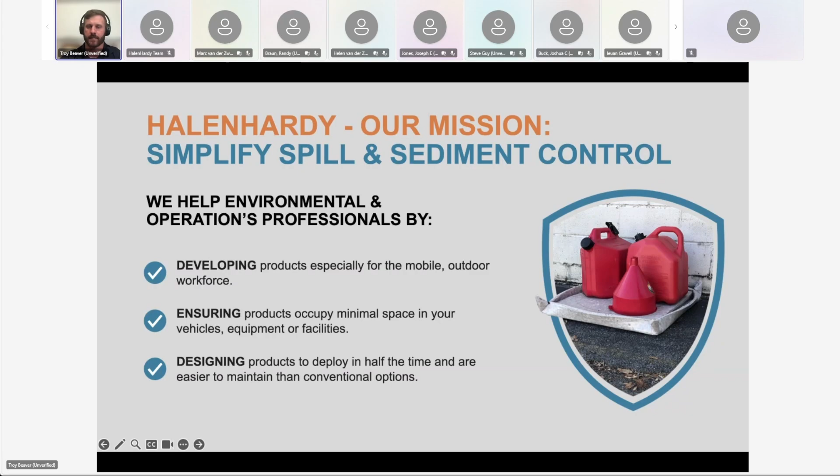Number two, ensuring products occupy minimal space in your vehicles, equipment, and facilities. We know that most of our customers, due to the fact that they're not working inside of a building, tend to have minimal storage space and place to keep stuff, whether it be working out of their truck, working out of a job trailer, you name it. So we're always looking for ways to make sure our products take up minimal space and designing products that deploy in about half the time and are easier to maintain than conventional options out there on the market, which we'll talk a lot about today.

4 core areas of focus: spill cleanup and containment in the outdoors. That's anything from land-based spills in wet, rainy conditions to containing and cleaning up spills on water, or products to put under persistent equipment leaks in the outdoors. We also focus on filtering oily sheen from inside of stormwater inside of secondary containment structures, as well as filtering sheen, silt, and sediment, as well as other contaminants from stormwater runoff around ditches, outfalls, storm drains, catch basins, you name it. And then mainly what we're going to be talking about today, our 4th area, which is one of our products that kind of falls within our dewatering area.

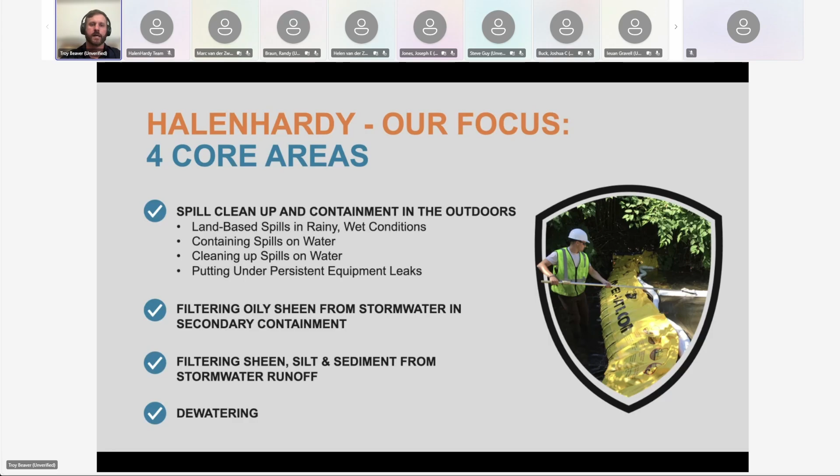So in the chat, it's always good to review these afterward with our folks to see how many people really know - are we educating them? So how many of you have built or seen a coffer dam being built? Feel free to just type yes or no into the chat, give a thumbs up, thumbs down, whatever it may be. We'll review those afterward and see how many people really knew something about this or didn't, but it's always good feedback for us.

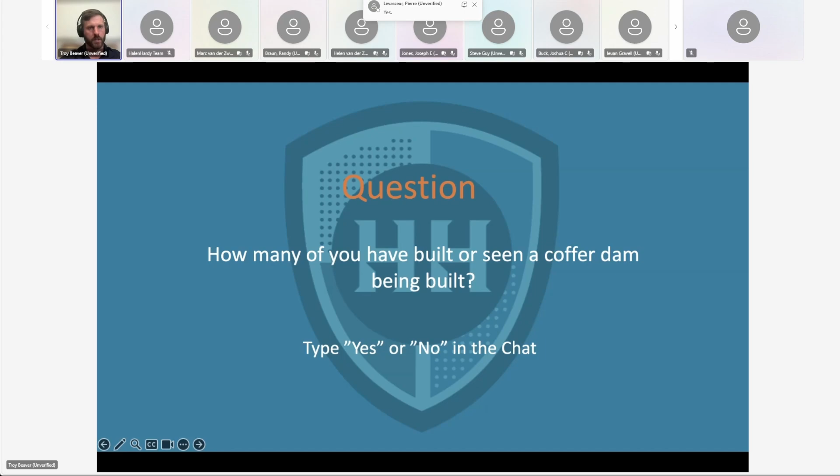So what is a coffer dam? A coffer dam is an enclosure built within a body of water to allow the enclosed area to be pumped out or drained. This pumping creates a dry working area so that work can be carried out safely. Coffer dams are commonly used for construction or repair of bridges, culverts, pipelines, or other infrastructure that travels through or under a body of water. Coffer dams can be made via different methods.

I have a few pictures here. This is a handful of dozens of different methods. I'm not going to get into every method of coffer dams that there is, but you can see a few here. On the top left, you have bulk bags or sandbags. On the top right, you have a metal frame with some sort of impermeable tarp material.

Bottom left, you have a large tube that is essentially filled with water. You pump water into that tube, it fills up, and it uses the weight of that tube to seal itself to the stream bottom and prevent water from getting into that working area. Bottom right, these tend to be deeper, bigger bodies of water, but what you call sheet piling, which is large sheets of metal that are essentially pounded into the stream bottom at a predetermined depth, creating an impermeable structure.

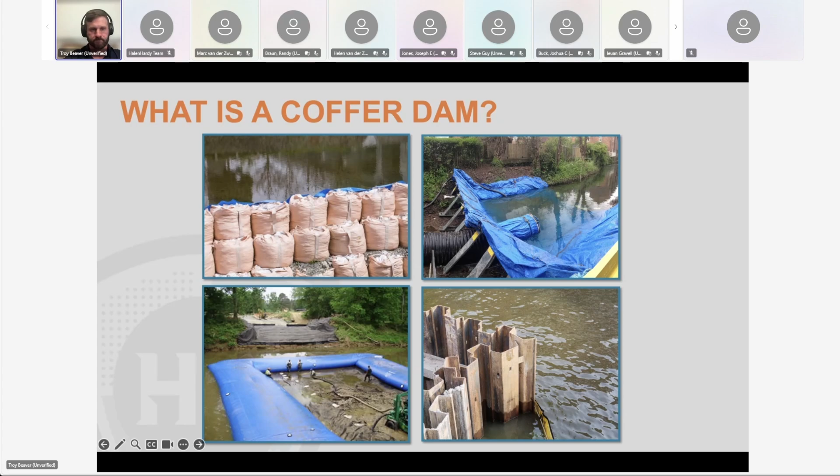So a little more in depth on why coffer dams - I like to say safer, drier, faster. There are a lot of times where work needs to be done in an area that's wet - it could be a lake, a river, a stream, a shoreline, some other body of water. Most of that work can only be accomplished if the area where you're working is dry.

You can see in this picture, this is a pretty extreme case. You've probably wondered, if you didn't know, how they pour bridge piers. Obviously there's a lot of water, especially over larger bodies of water, so you can see here a pretty large coffer dam. Not something we're going to be talking about with our product, but it gives you the far end of the spectrum when it comes to coffer dams.

These coffer dams can be used for things like I mentioned before: bridge construction, shoreline restoration, boat ramp construction, pipeline construction or inspection, repairing retaining walls or bridge piles, or removing even sunken vessels. Overall, a coffer dam takes an otherwise difficult area to work in, due to the fact that it's wet or underwater, and makes it safer, faster to do the work, and drier in order to accomplish a task that otherwise could not have been accomplished.

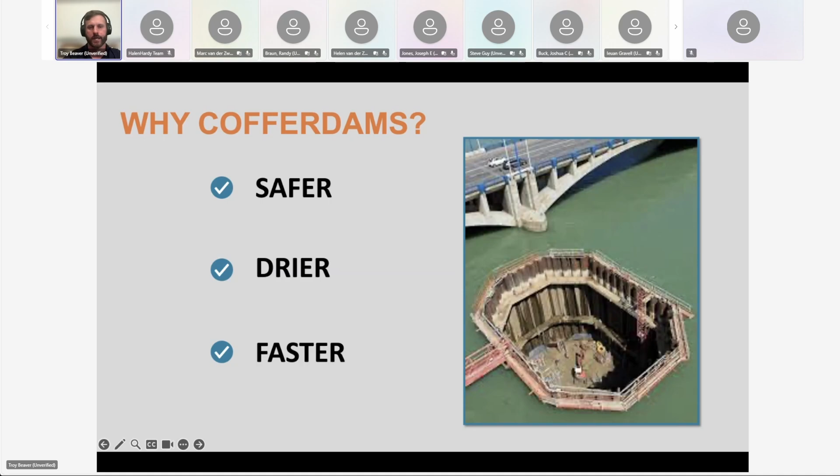What are the difficulties with some of the traditional styles of coffer dams? There are always some difficulties associated with any style of coffer dam that you're going to use. Here's a few bullet points. Problem number one: traditional coffer dams, no matter what you're using, typically require a lot of time and equipment - time to fill and deploy sandbags, or install sheet piling, or move dirt around, and a lot of manpower or equipment to install.

You can see in this picture here, this is using bulk bags, with some sort of overhead crane structure to drop these things in. You can see all the people standing there - well, half of them aren't working, but a few of them are.

There's also the time to prepare the stream bed, remove all the rocks, make it as flat as possible. Because if you're trying to keep the area on the other side of the dam dry, you can't have a lot of structures underneath whatever you're using to create your coffer dam, or else it's just going to cause leaks and water to pour into the area you're trying to work within. So you need to get all the rocks removed and make that as flat as possible.

Time and pumps are required to fill the water fill barriers. I talked about the tube fill barriers earlier - having pumps there to pump in, depending on the size of them, takes time. How long does it take to pump water into those to fill them up? And then there's time to redeploy in case of a blowout.

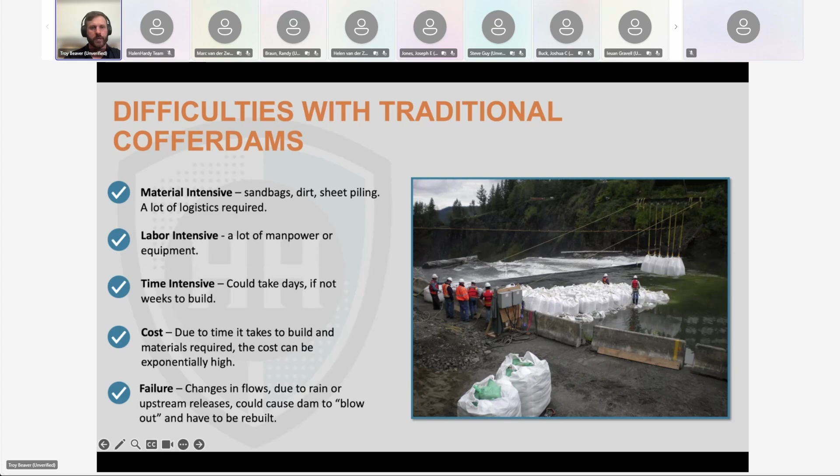So hopping into what we're here to talk about, the actual product. To address these difficulties, we have what we call the instant coffer dam, which is made to simplify the process of creating the coffer dam and address the difficulties I just spoke about. It's lightweight and portable, deploys in minutes with minimal manpower. I'm going to show you videos and pictures of all these bullet points, but just running through them real quick right now.

It uses just the flow of the water to deploy itself and the weight of the water to anchor itself. You can attach units together to make unlimited lengths. And finally, it's environmentally friendly because it creates limited to zero waste, due to the fact that it can be washed and reused over and over again.

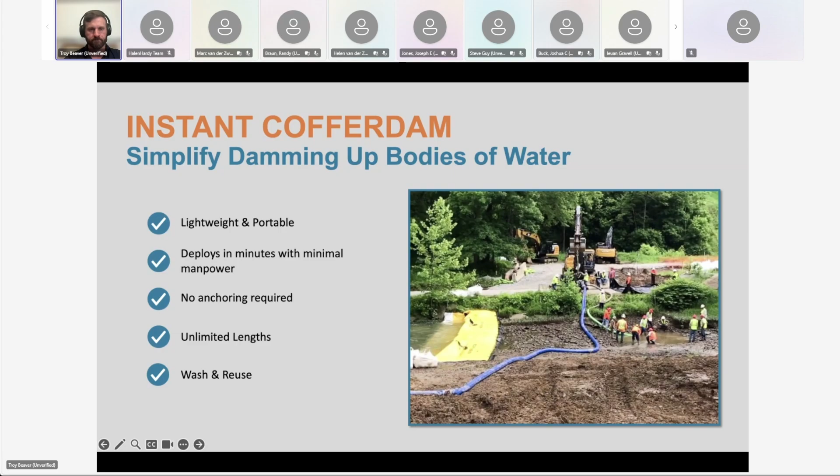So how does it work? The concept's actually pretty simple. As I mentioned before, the instant coffer dam uses the flow of the water to deploy itself, and then the weight of the water to anchor itself. So as the flow enters the dam, it deploys itself, just using the weight of the water to hold it to the stream bottom and then seal itself to the stream banks.

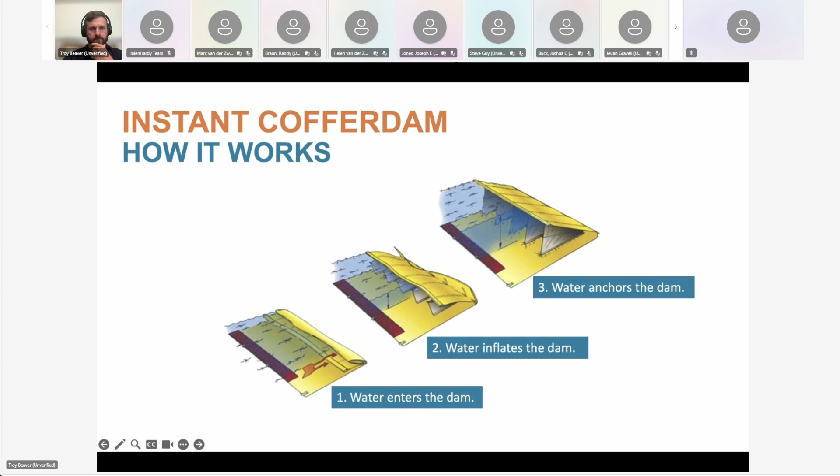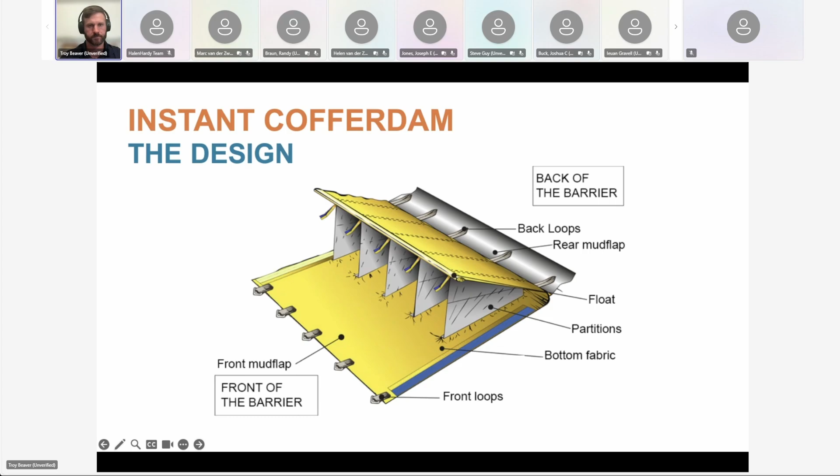So how does it anchor itself, or stay in place without any physical anchoring required? It's the force of the water inside the dam holding it in place. It's engineered at a 4-to-1 ratio, based on the width from the upstream side to the downstream side being the 4, and the retention height of the dam being the 1. For example, a 28-inch high dam is approximately 9 feet from upstream to downstream. This means you get 4 times the vertical thrust compared to horizontal thrust, giving it great adherence without requiring anchoring.

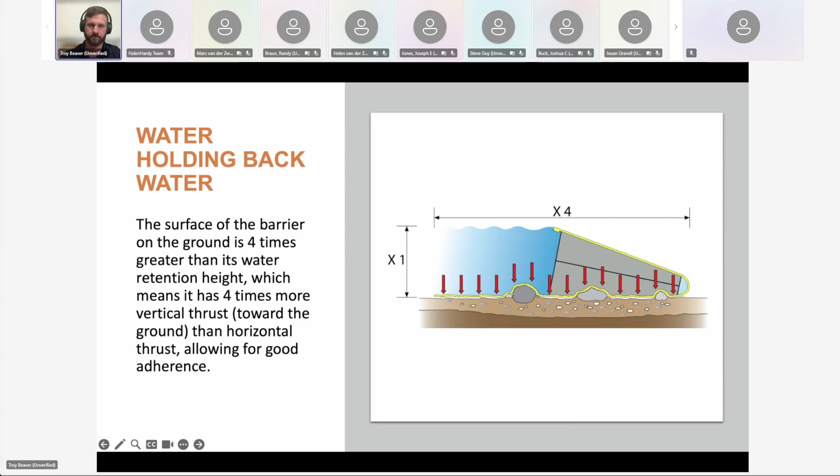So how does it work? This video does a pretty good job of showing a pretty simple installation. 39-inch high dam here, 50-foot long. You can see the stream is about 30 to 35 feet wide.

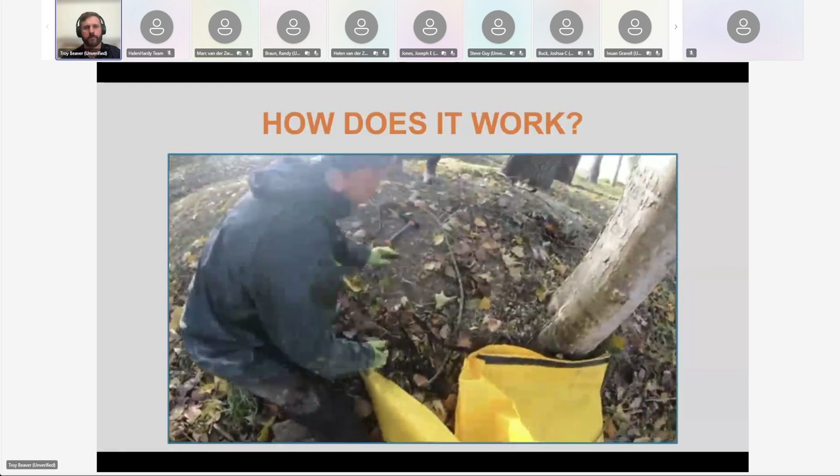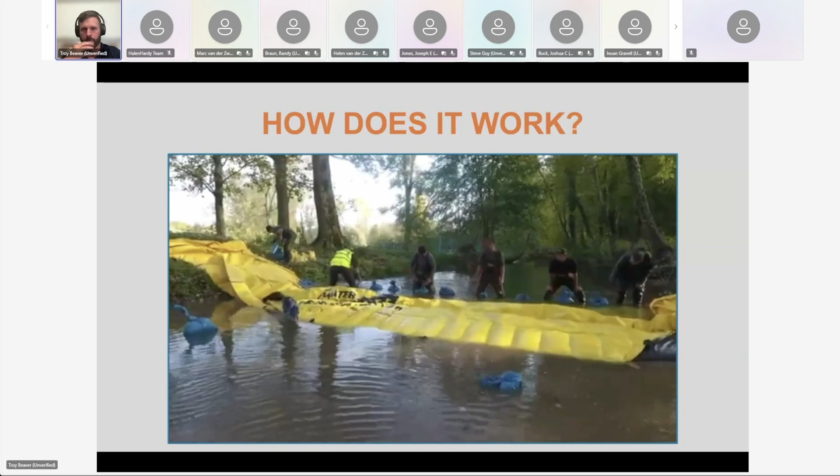Anchoring it just holds it up on the banks until it gets water into it, not really anchoring it on the leading edge. You're just submerging that leading edge and standing on it. Some people, we recommend, put a row of sandbags along there so you don't have to stand there until it gets water into it. But once it has about 6 to 8 inches of water in it on a dam that size, it's holding itself in place.

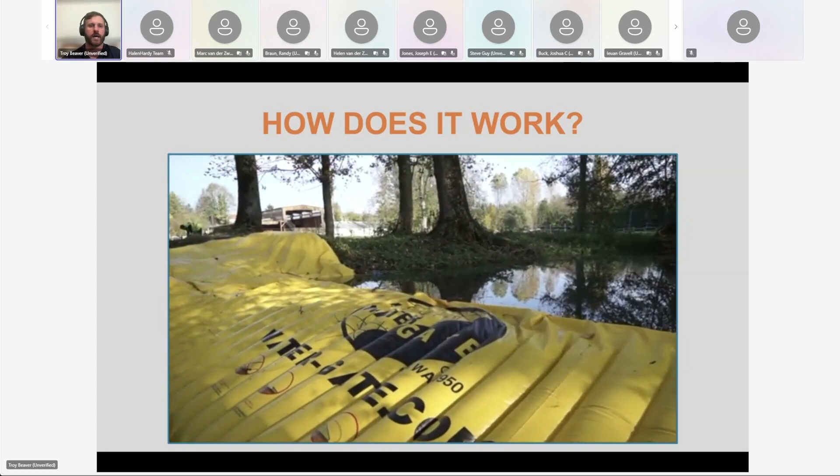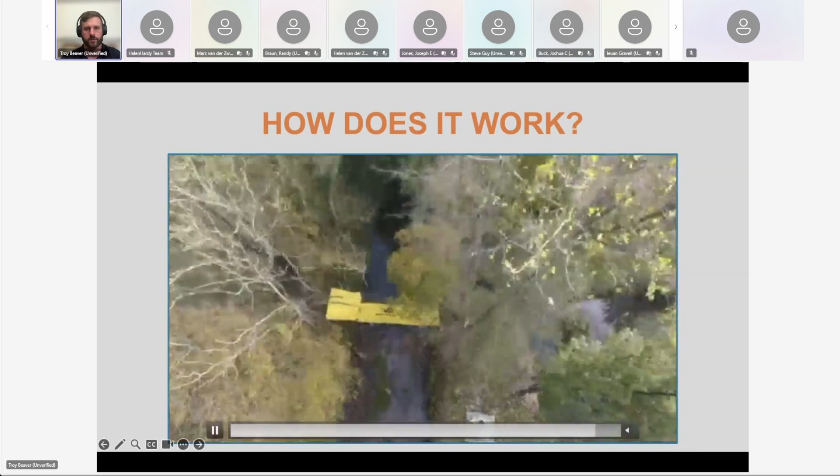So it's just using the weight of the water. The sandbags just help a little bit to hold it down until you get water flowing into it. But you can see in a matter of minutes you can have a dam deployed. In this case, they're using a diversion around another channel, and the downstream side is the dry portion they want to do work in. It's as simple as submerging that upstream bib, letting water fill it and anchor it down, then you can start pumping on the downstream side to dry it out. In this case, it was a pretty steep slope stream, so the water used the path of least resistance and headed downstream, so no pumping was actually required.

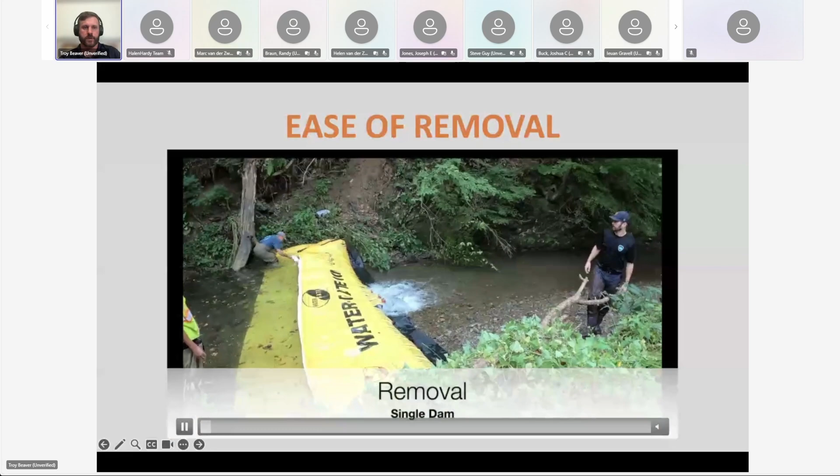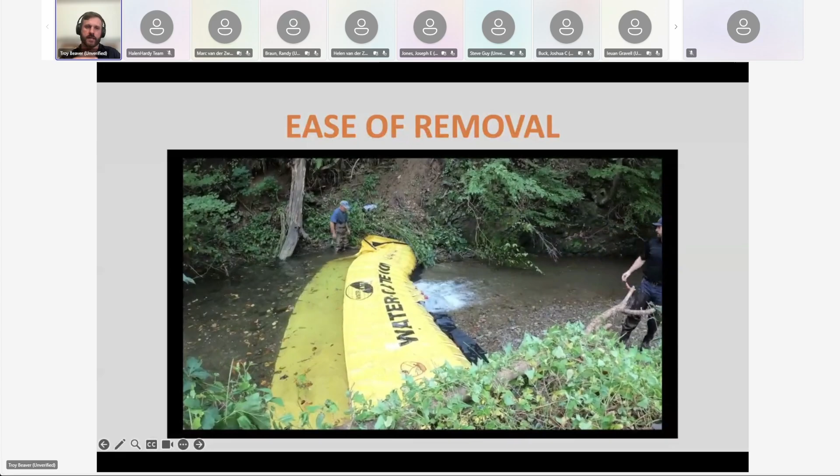For a single unit, all you're doing is going to the opposite bank of where you want to swing it. You start peeling it off that bank and allowing the water to flow around the outside. Once the water starts to flow around the outside, it uses that flow to swing it to the opposite bank, and then you can pull it out, wash it up, and reuse it. Those lifting straps are on the back end — you grab hold of those and pull it out.

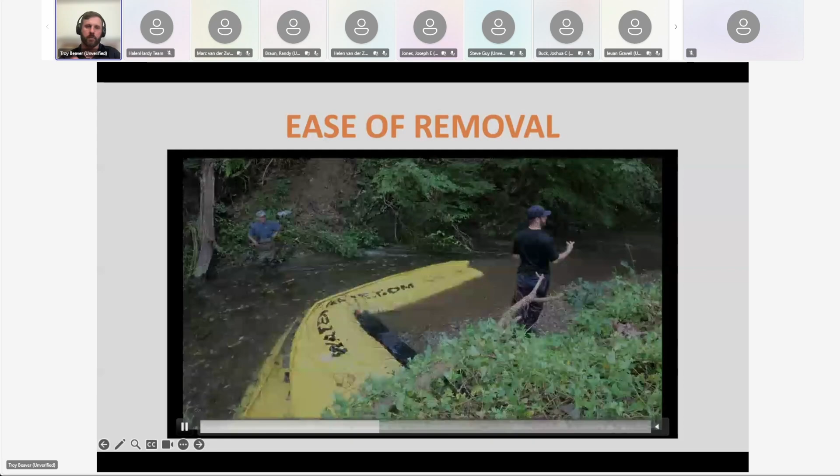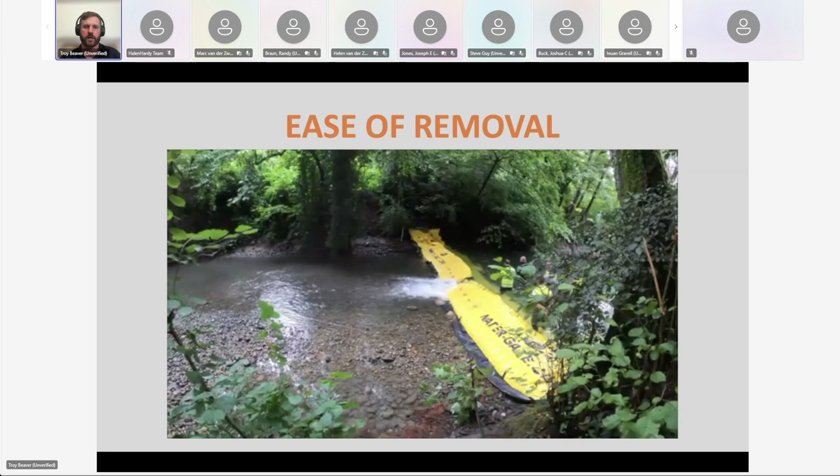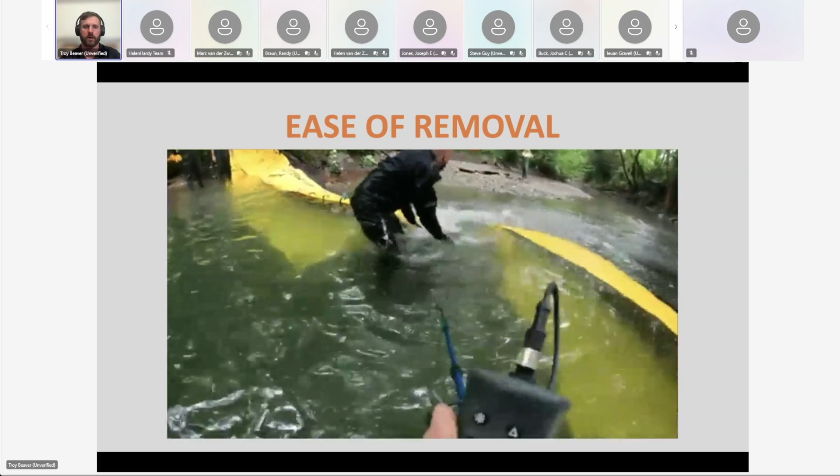With multiple units, it's not as easy as just going to the opposite bank. As mentioned, you attach multiple units together. You go to those seams and start peeling it apart — peel apart the top seam, let the water start to recede a little, then go to the stream bottom seam and peel that apart. Now it's using the flow of the water, just like a single unit would, to swing the units apart and allow the water to recede. The units will swing, let the water recede, then you can just pull them out, wash them up, and reuse them.

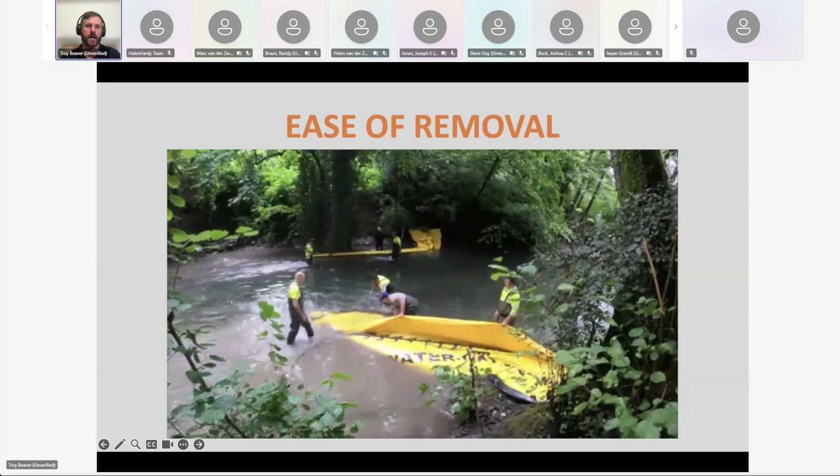So it's pretty simple, there's no difficulty to it. You're just using the flow of the water, just like you use the flow of the water to inflate it.

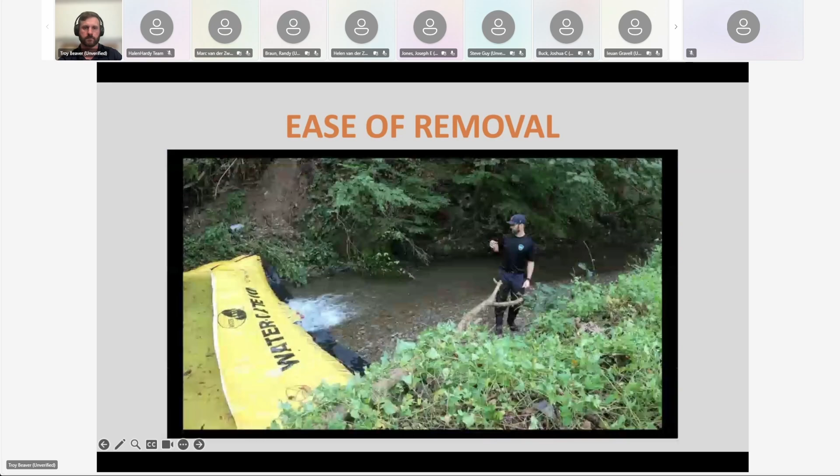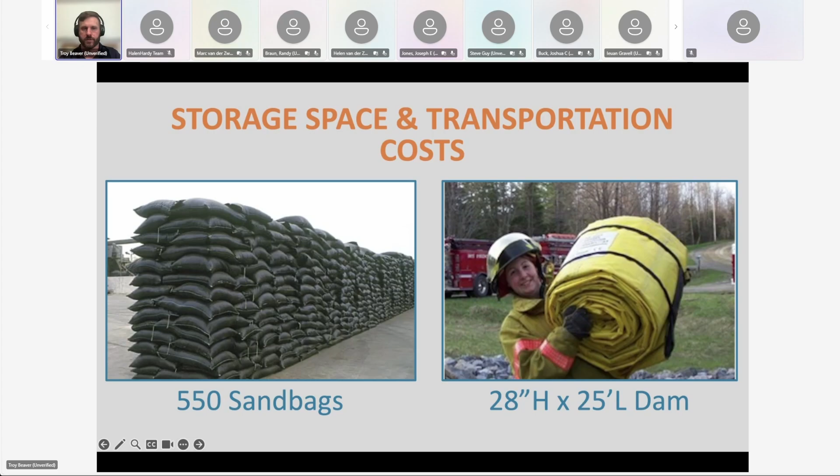So I haven't done the calculation on, you saw that first dam in the first video, which was 39-inch by 50 feet. I could probably do those calculations, but you're probably looking at 5 to 6 times that amount to create that same dam. So you can imagine the amount of storage space, transportation costs, and everything else associated with trying to get that stuff on site and deploy it.

As I mentioned, unlimited length. So these units can be attached together. On the left there are 30-foot units attached together, so 90 feet coming in three 30-foot units. Attaching them together makes it nice because if you have one project where it's a smaller stream and you just need a single unit, you're not trying to manhandle a 90-foot unit, right? But if you get into a larger project where you do need 90 feet, now you can take multiple units and attach them together to make that.

It takes minutes to attach these things together once you get good at it, a couple times, and it becomes pretty simple to attach the units together. All the attaching is very heavy duty Velcro. It's been third party tested that it's going to hold up under the pressure of the water that's going to be created on those dams based on the height of dam you have. We've done pretty much every height of dam we have in some pretty large bodies of water, and we've never had a single unit fail at the attachment point.

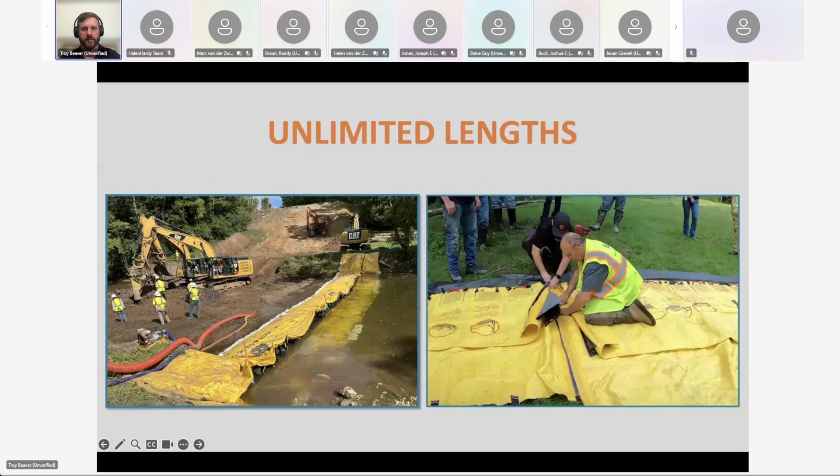Another key attribute, quickly access remote areas, right? So this is actually the picture where you saw the firefighter carrying the dam. This is the same size dam that you would have there, 28-inch high, 25-foot long. So about a 10 to 15-foot wide stream you can see here. Very remote area where this needed to be dammed up.

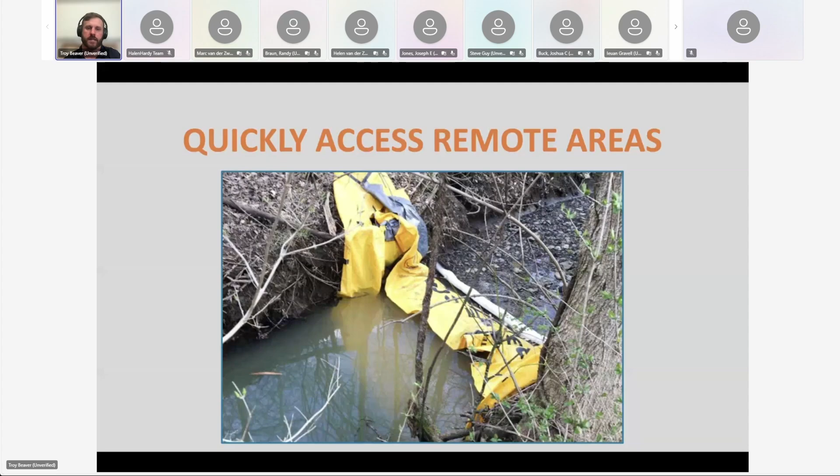So down over steep banks, it would have been very difficult to get any type of equipment in there, difficult to get any type of materials really in there to effectively build a dam in a cost-effective and timely manner. This took minutes. They come rolled up, you can roll it down over a steep bank, get down there, unravel it, stretch it out across the stream in minutes, and you have the water dammed up.

The other thing that I mentioned before with traditional cofferdams, when you're building them, you have to get the stream bottom pretty smooth, right? You don't want any rocks or any type of objects underneath traditional cofferdams, because all they do is create void space where water can travel through, essentially getting into your dry area and defeating the purpose. With this, really all you need to do is that first 12 to 18 inches of where the bib lays on the stream bottom, that's where it's creating its seal.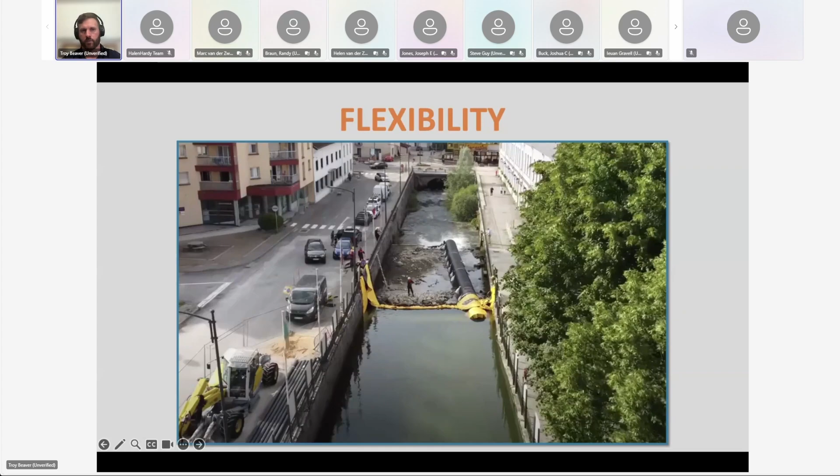As water enters that dam, it's using the weight of that water to conform it and seal itself better. And the majority of your seal is happening within that first 12 to 18 inches. So again, time savings, money savings due to its flexibility and not having to remove all that stuff before installing the dam.

Here's another good picture showing culvert repair, right? Flexibility of the dam going up the sides of the wall. You can see just anchoring it into the wall of the culvert there. In the event that you can actually get to the top of the wall, if it's not a fully enclosed culvert, you can just lay it up over the top and put some weight on it to hold it there.

In this case, they're obviously inside a culvert, so they are drilling in and putting anchoring points in, where it would be difficult to get a piece of equipment in, get different types of materials in there to build a traditional cofferdam. Here's a good picture of it in a very difficult area, but the flexibility of it to go up walls that are approximately 90 degrees straight up.

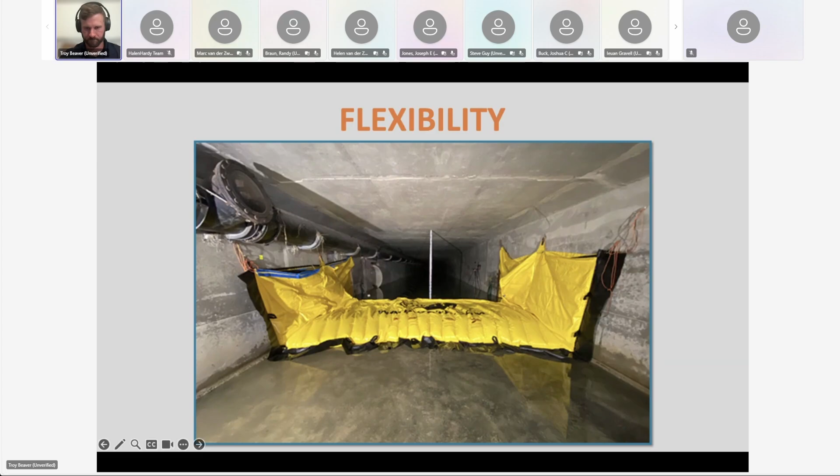So from a time savings aspect, I'm comparing what it would take to build a 25-foot long by 28-inch high dam. So when do you typically put in our 28-inch high by 25-foot long? It's approximately a 10 to 15-foot wide stream, right? You need excess length to go up on each bank to make sure you're above the height of the dam. So with a traditional cofferdam, you're looking at a minimum of about 6 hours to mobilize, deploy, and tear down in a stream about that width with a height of 28 inches of dam.

With the instant cofferdam, you're looking at under an hour to mobilize, deploy, and tear down. The majority of that time actually is just your mobilization time. Obviously, due to their size, you're not going to need a trailer or flatbed, so they can easily be stored on site or even brought in a pickup truck.

Not to mention, in the event that there is a heavy rain event, the dam can actually overtop, as I mentioned before, by about 33% of its height. So it can just remain in place, unlike a traditional cofferdam, which would probably blow out and need to be completely rebuilt.

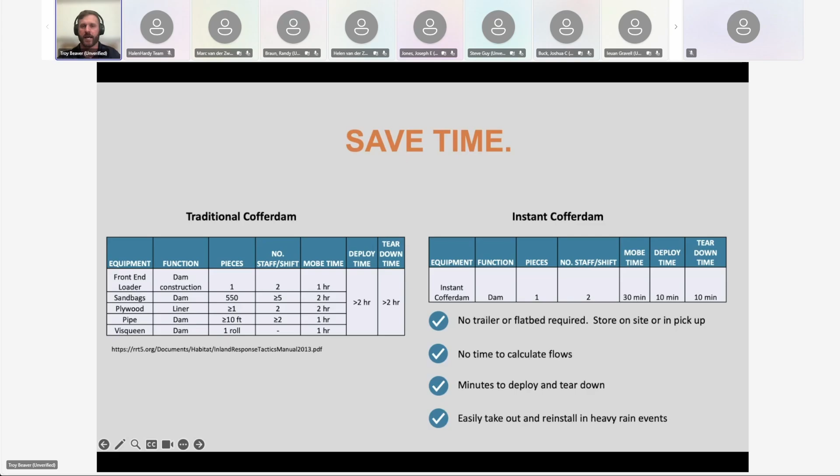If you're more comfortable pulling the dam out and you don't want to watch it overtop and take my word for it, that just takes minutes to take the dam out and then, again, minutes to redeploy. So you're not talking a whole lot of time in the event that you have some significant changes in weather.

As far as saving money, looking at that same 25-foot by 28-inch high dam comparison, cost savings are pretty significant just on the first initial install, right? So on the front end, you're looking at approximately $5,500 for the equipment, tools, labor, and disposal costs associated with a traditional cofferdam. The majority of that cost is tied up in the time and labor it takes to build and tear down the dam.

With the instant cofferdam, you're looking at a cost of about $3,100. The biggest thing to note is these dams are able to be reused over and over, whereas all the items used on a traditional cofferdam are single-use items. Not to mention limited transportation costs, no equipment costs, and no disposal costs associated with the instant cofferdam.

This chart also doesn't take into account the cost of having to delay the start of the job due to waiting on materials. Sometimes you're waiting days, if not weeks, to have the materials delivered to site and installed. At that point, you could have installed our cofferdam and taken it out a few dozen times if you needed to.

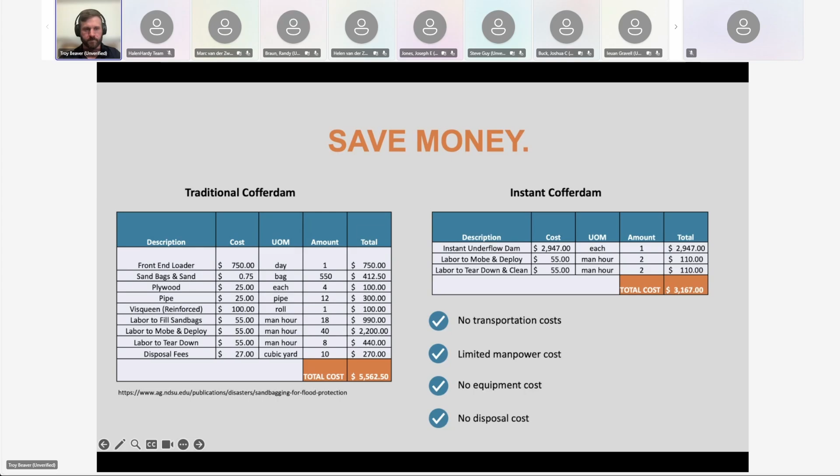So accessories. I have a few accessories. The main one that I'm going to talk about today is the diverter attachment, right? When installing any type of cofferdam, ours included, you need to figure out a way to divert the water, for lack of a better term, right? And this can be done in a plethora of different ways, right?

As water fills behind the dam, eventually the water is going to reach the height of the dam and pour over the top, therefore defeating the purpose of having a dry area on the downstream side of your dam. So you need to figure out a way to divert it. How do you do that?

I showed you a picture of the corrugated pipe with the cofferdam going around it, right? Water can flow through that corrugated pipe at a predetermined size, based on your flow rates of water; you need to make sure that that pipe can keep up with your flows. Water flows through it, goes to the downstream side of your dry work area.

Another way is, you saw in the first video I showed you, there was a trench or a bypass stream tributary that the water could essentially go around the dry work area in. So that's able to keep up with the flows. The water can continue downstream around your dry area. You do your work there.

Another way, probably the most common that I run into, is pumps, right? So you have a litany of pumps on the upstream side that are sized to keep up with whatever your flow rates are. The discharge of your pumps, the hoses, the pipes discharge below your dry work area. So you just keep the pumps running. It can be a costly way to do it, but it is a common way that we see. If a pump fails, you can always just bring in another pump.

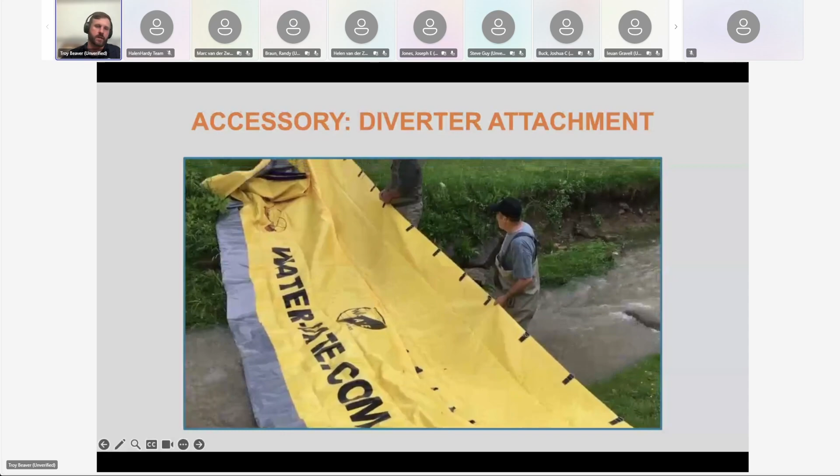This is one of our accessories that we have. We call it the diverter attachment. This attaches to the top of your dam. So you have a hard plastic piece here. We're just showing a small stream. Here we didn't do any stream prep work.

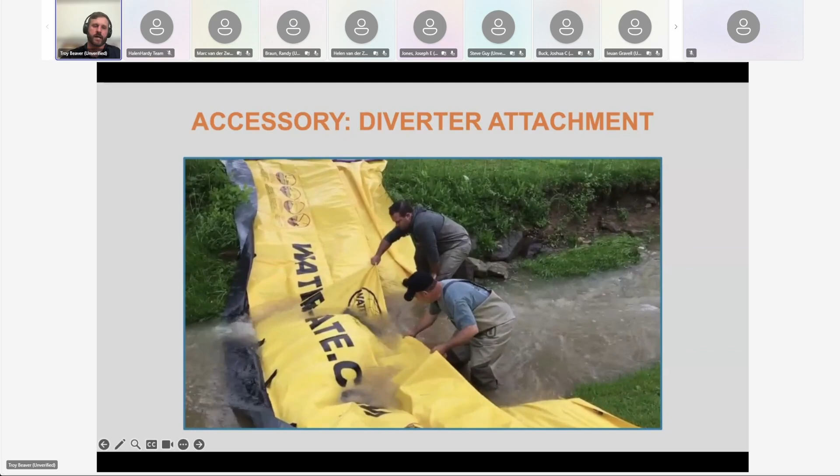This was just to show the accessory, the diverter attachment. So don't mind the little bit of water that is coming through on the downstream side. We didn't remove any rocks. We just wanted to show the diverter attachment and how it works. So really, water filling the dam.

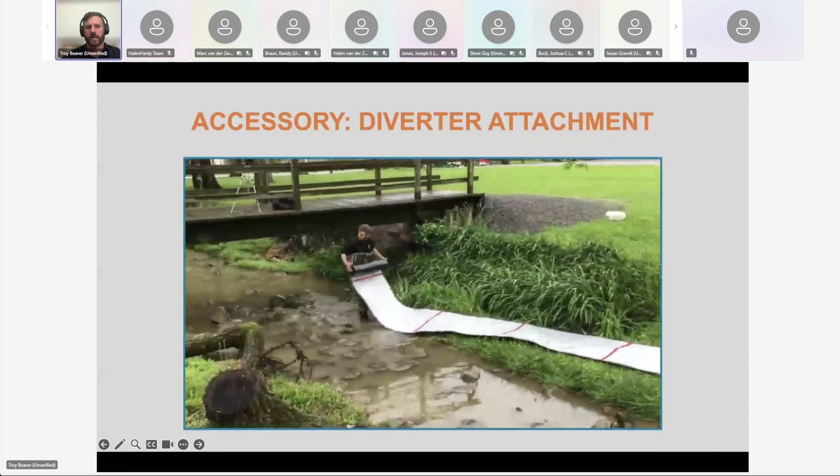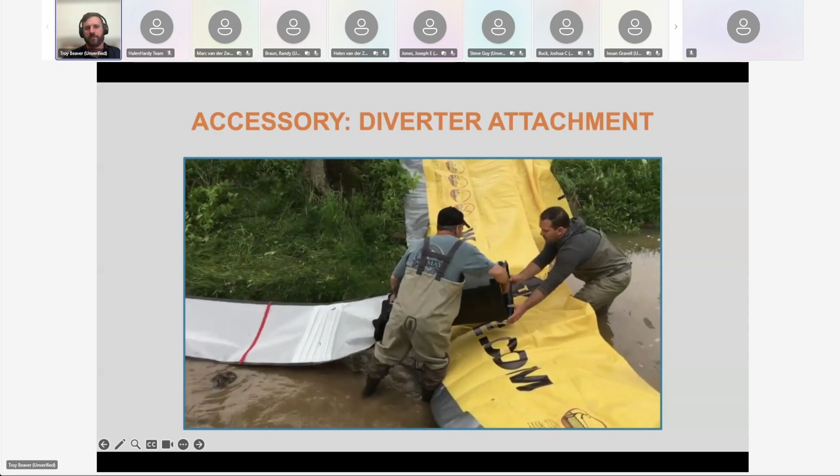So you can see the hard plastic piece, and then you have a flexible pipe that attaches to the end of the hard plastic piece. The diverter attachment will attach directly to the top of the flexible dam. So now as water rises, water can flow through that diverter attachment and therefore keep the water from overtopping the dam. It goes through the flexible pipe and discharges below your dry work area.

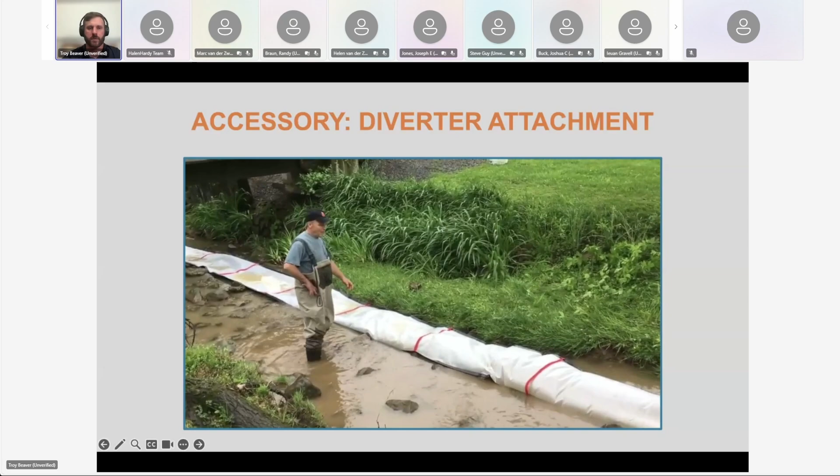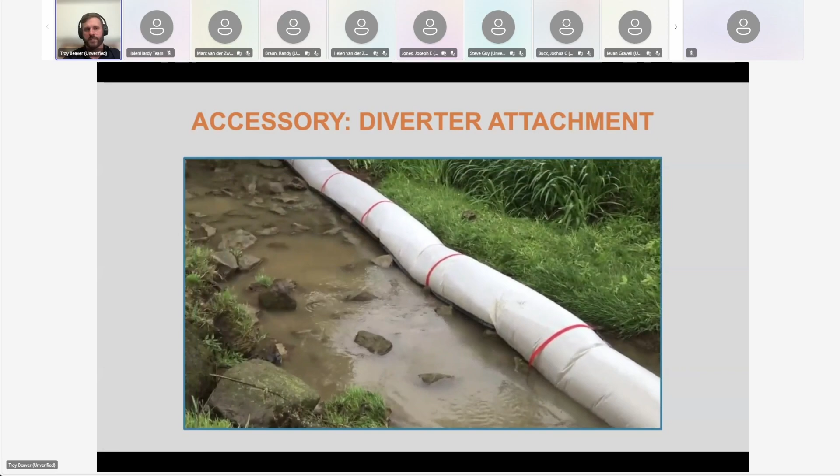Same as with the dams, there's an unlimited length with the discharge pipe. So the initial is a 75-foot section, and then you can attach sections to that to run unlimited lengths. Each one of the diverter attachments flows 1,440 gallons a minute. So this isn't for every scenario, right?

You have to do flow calculations and make sure that this can keep up with your flows, but especially for smaller, lower flow scenarios, smaller streams, it's a great alternative to having to keep pumps running. So each diverter attachment flows 1,440 gallons a minute, and you can attach 2 units to each dam. So you're essentially getting about 2,800 gallons per minute that you can bypass through the diverter attachments past your dry work area.

So I'm going to talk a little bit about installation methods, just so you guys can wrap your heads around some of the different installation methods that we run into. I'm talking about the most common ones here, showing you some pictures of these being deployed in those scenarios. So the first is perpendicular on a steep slope.

So perpendicular, I'm talking about how the dam is to the flow of the stream. So obviously perpendicular to the flow, straight across from stream bank to stream bank. And this is a steep slope stream. What I mean by that is the slope from the upstream side to the downstream side of the dam is fairly steep.

So you can see here, you install a dam on the upstream side, and then whatever your bypass method may be. In this case, corrugated pipe, could be our diverter attachment, could be pumps. But either way, the slope is so steep with the stream that when that water discharges on the downstream side of whatever you're using to bypass the water, it's not coming back up towards your dam, right?

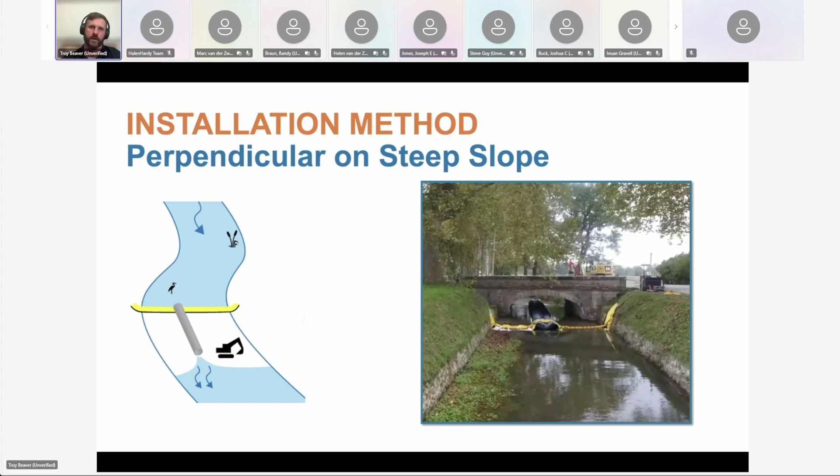Because this slope of the stream carries the water downstream away from your dry work area. So that's scenario 1. Scenario 2, this is a perpendicular on a shallow slope, right? So the stream is not as steep as the one you saw previously, right? So

when your water discharges through whatever your diversion method is, in the drawing you're seeing a corrugated pipe. In the picture you're seeing here, you're not seeing the actual pumps, but the right side of this picture is the upstream side. So you can barely see the corner. Couldn't fit the full picture in here, but you're barely seeing the corner of the upstream side of this dam here. The pumps are pumping from that side, and the pipes you're not seeing are running essentially behind us right now, and then discharging on the left side of your screen, so on the downstream side.

This is a shallow slope stream. So that water that was discharging from these pumps was wanting to come back upstream towards the dry area. So you can see all we did here on the left side, you can see the left dam. That's actually the downstream side. We just installed another dam reverse. Right? So now the water that's trying to flow back upstream due to the slope not being very steep is essentially deploying the dam in the reverse direction.

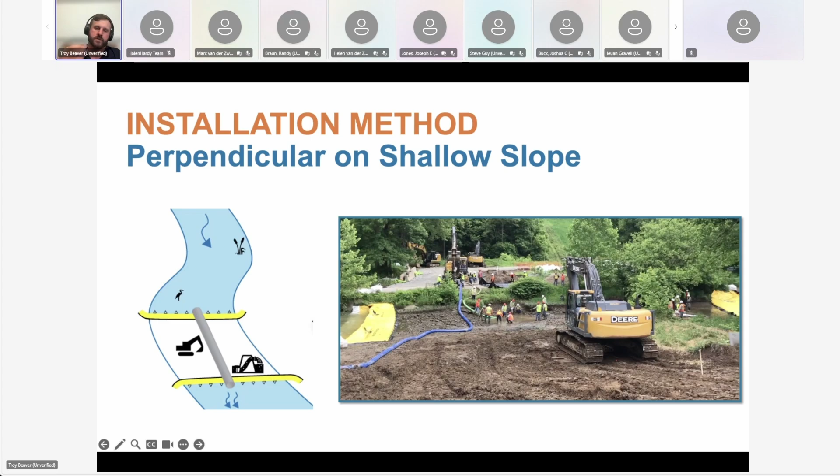So you got natural flow on the right side, deploying the dam on the upstream side, and you got the bypass flow that's trying to come back upstream on the left-hand side of your picture, deploying the downstream dam. So all we're doing is just reversing how you're deploying the dam and using that flow from the bypass water to deploy that dam, preventing it from coming back into your dry area. So you can see here, now they're able to pump that area dry, not worry about water coming from the upstream side, which is the most common, or the downstream side in this scenario due to the slope of the stream.

What about another one, bridge repair work or some sort of in-water structure that you're trying to repair? You can see here, just using the bridge pier as your flow around, right? So your flow is coming from essentially this side of the bridge, right, that we're on. Looking at this picture, you're diverting the water around the bridge pier so it can continue downstream, and you're creating your dry work area underneath the bridge there. This would be, again, more of a steep slope scenario where the water will continue downstream.

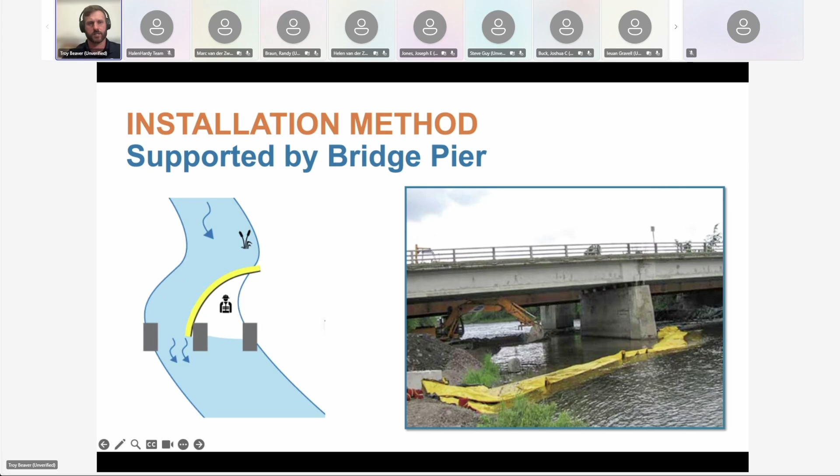I didn't put a picture in here, but imagine if it was a not so steep slope, a shallow slope. You would just continue essentially creating a U shape with that dam going around the bridge pier and then back to the same bank that you started on below your bridge. So as water flowed around, if it did want to, for whatever reason, make its way back up into your dry area, you would just continue around, which is essentially shown here. Here we have no bridge pier, but we're creating a U-shape installation, right?

So again, you don't need to dam up the entire stream. You may be doing some sort of wall repair, some sort of work along a stream bank or a river bank where you don't need to dam up the whole stream. You don't want to have to worry about pumping water completely around a larger stream that you're damming up. In this case, you're just damming up a portion, creating a U shape.

So you're coming off your upstream bank, you're going out into the stream however far you need to create the dry work area that you need. You're going downstream parallel to the flow, and then you're coming back to your stream bank that you started on. And water will continue to just flow around the dam as you pump your area dry and work within that dry area.

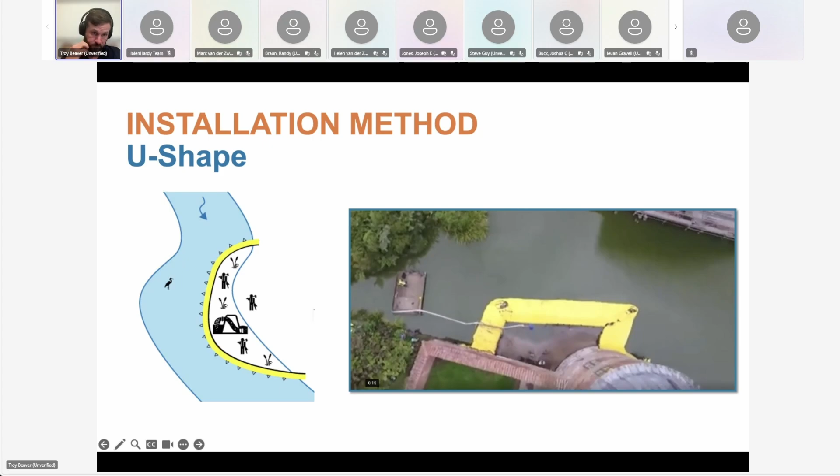All right, final thing. There's a lot of technical stuff I could get into on these coffer dams. We have a whole guide that addresses technical questions. I can answer questions if you have them in the chat. I don't want to bore you with all the technical details of exactly how you install in every scenario. I just wanted to give you a broad overview of the technology itself, how it works.

The one final thing I want to touch on is the other dam we have to address—a totally separate issue, but it works very similar. This is what we call our instant underflow dam, compared to the coffer dam which creates a dry work area in stream. We tend to have a lot of environmental professionals on our webinars since the majority of our products address environmental issues, and this one falls more in line with that. In the event that an oil or fuel hydrocarbon spill reaches a flowing body of water, this version of dam will quickly dam up the stream. I like to talk about it because it falls in line with the coffer dam.

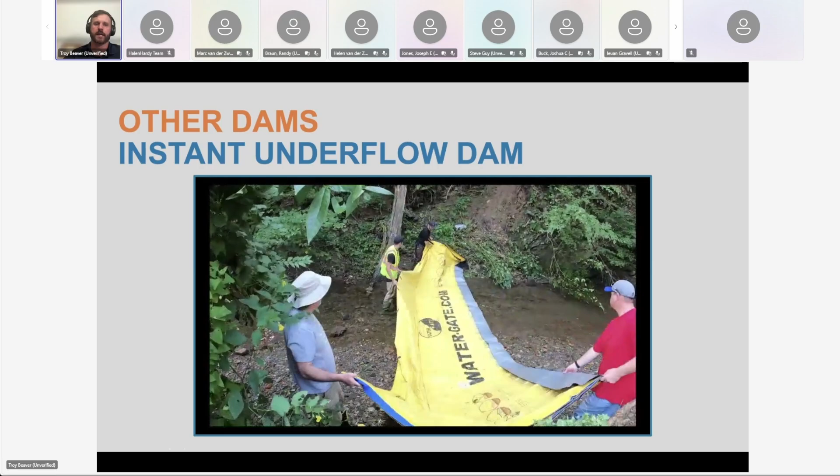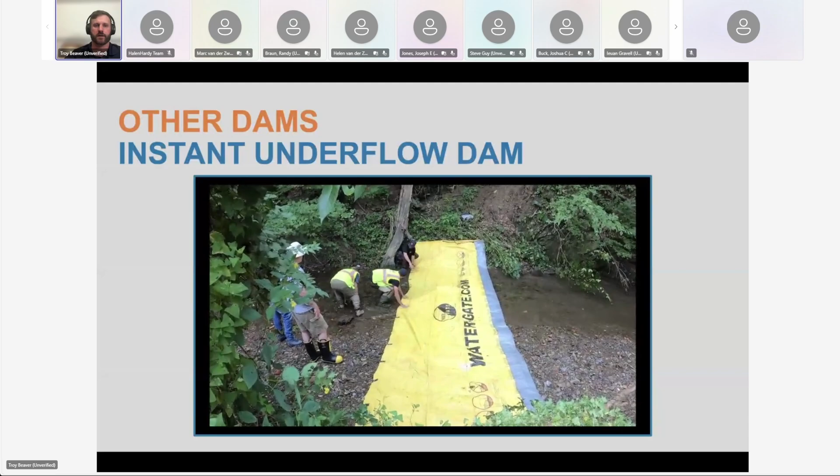The video does a pretty good job of showing exactly how this works. In the event of a spill, very similar to the coffer dam, you're going to go up on each bank above whatever height of dam you have and submerge the leading edge. You're going to either stand on it, put rocks on it, or put a couple sandbags on it until it gets a few inches of water in it to start weighing itself down. Here we were just using some rocks—either way, you're getting something to anchor it until the water gets in. Once it has water in it, it uses the weight of the water to anchor itself.

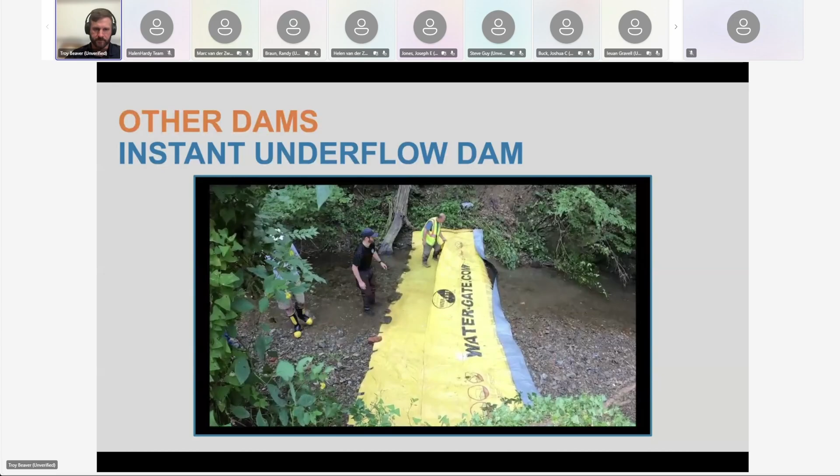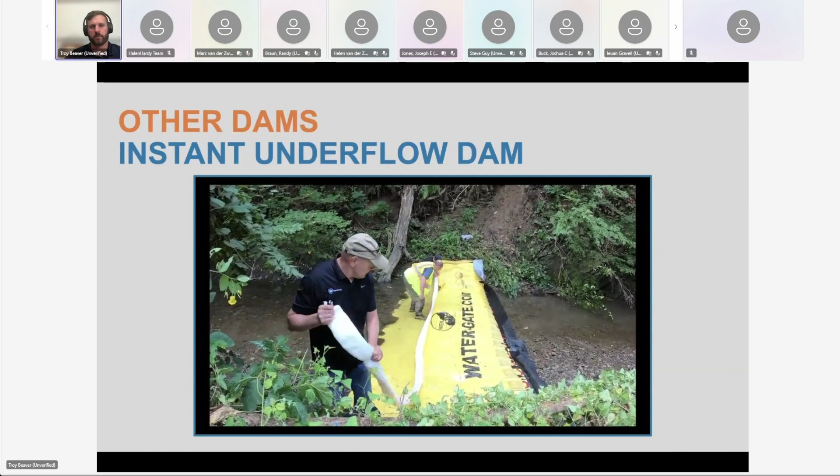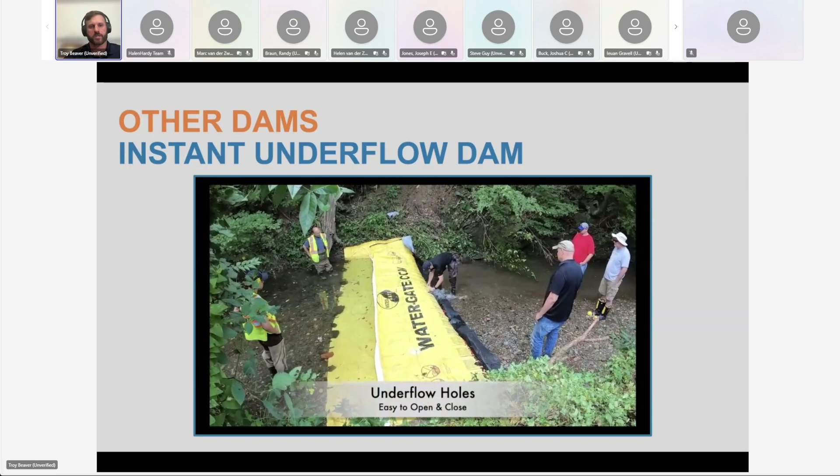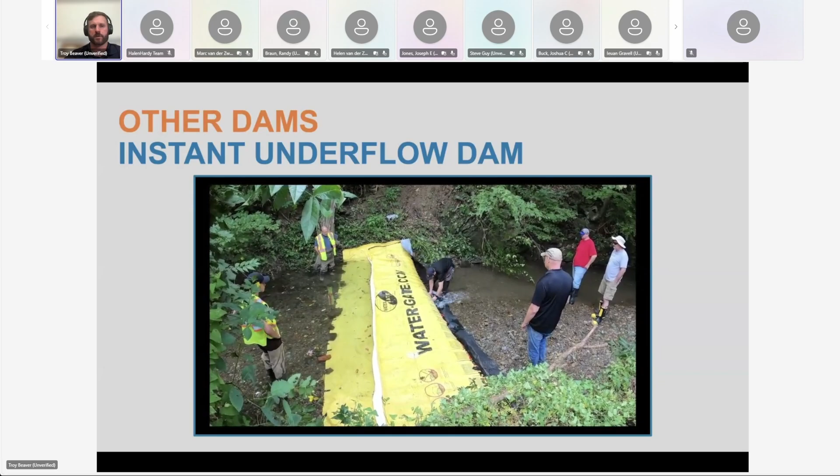You can imagine most oils and fuels will float on top of the water. So when floating oils or fuels come into this dam, we put some sort of absorbent boom that can start to absorb that spilled product to protect the dam. But the other thing that happens is, as with the coffer dam, water fills the dam, and the oil floating on top eventually wants to breach the top. In this scenario, you're looking at about a 5-minute time lapse—you can see the water fill the dam. Imagine those leaves are your floating oils coming downstream; you just stopped them. Now the water's filling the dam, but you don't want that oil to breach the top and continue downstream. There are underflow holes built into the downstream side of this version of the dam, unlike the coffer dam, that allow the clean water underneath your floating oils on the upstream side to continue downstream while you do your cleanup efforts upstream.

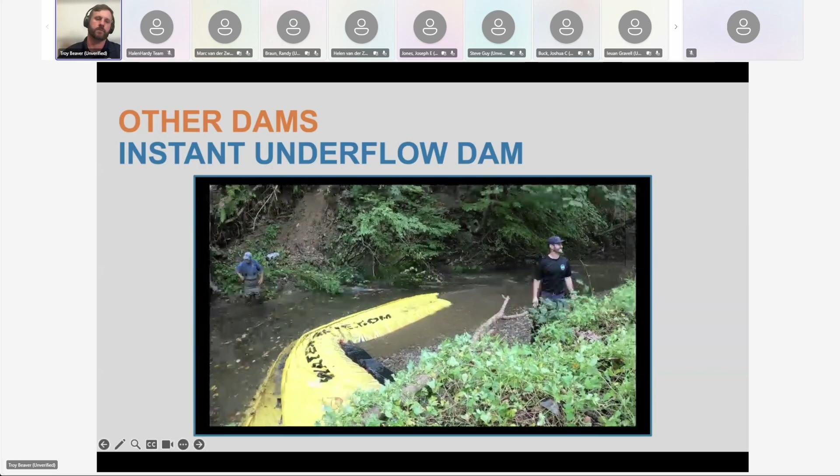So that's just another version that I always like to show. When I did my underflow webinar presentation, I showed a little bit on the coffer dam. Now, doing the coffer dam presentation, I always like to mention the underflow dam too. So I just wanted to quickly show that—it may not apply to most of you, may apply to some of you, but it never hurts to show it.